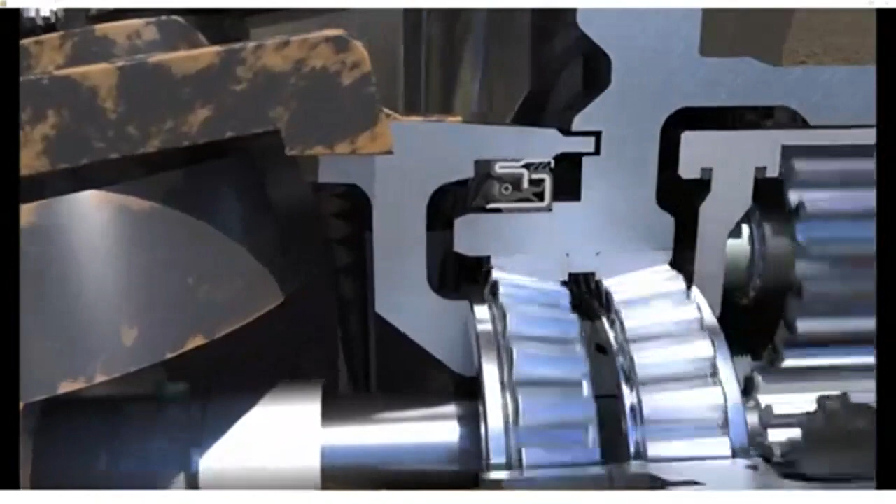long periods of time. SKF's Mud 11 multi-lip cassette seal keeps wheel end applications running smoothly and efficiently. It repels dust, dirt, and mud and stops lubricant leaking into the environment. The special design improves sealing performance and prevents downtime.

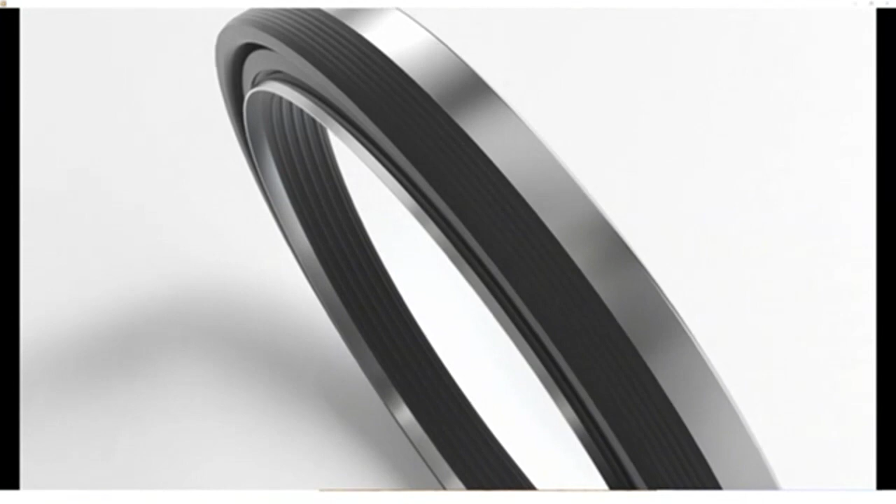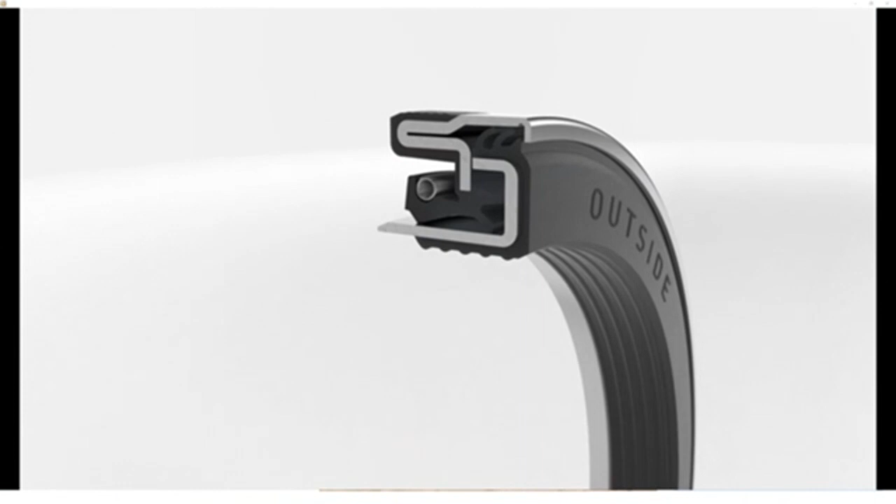Several innovative features help the Mud 11 to raise performance and reliability. Its outside diameter is half metal, half rubber. This improves static sealing, improves heat dissipation, and keeps lubricant within the housing. Because the seal has its own counterface, there is no need for shaft machining.

A rubber bonded sleeve makes installation easier and protects the sealing lips from damage during transportation, handling, and installation. All SKF Mud block cassette seals are designed with an integrated wear sleeve and a rubber inside diameter. A spring-loaded main sealing lip maintains lubrication and a strong seal, regardless of rotation direction. To avoid dry running, all sealing lips are pre-greased.

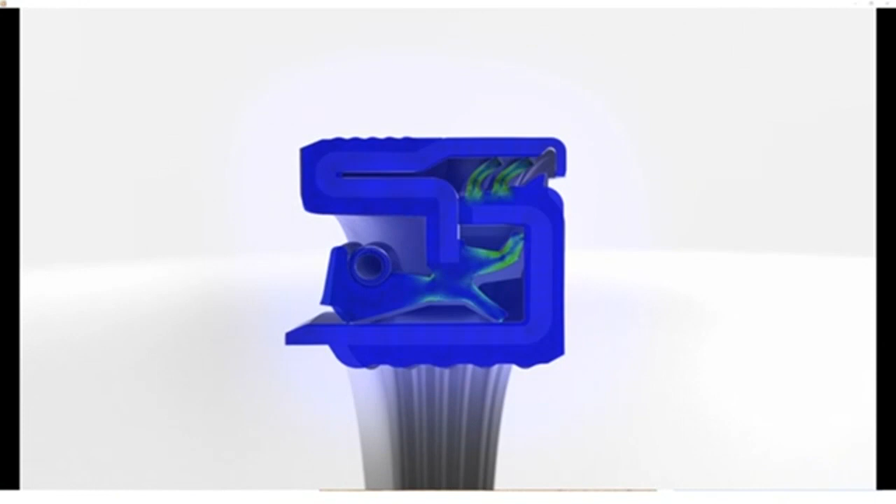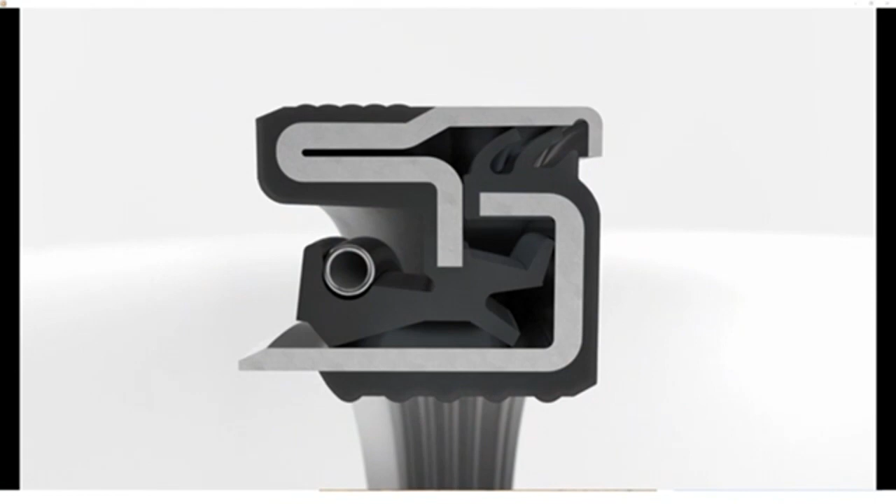Using finite element analysis, SKF's engineers can design an optimal seal. Lip configuration can be modified, for instance. Sealing lips can also be made from a variety of materials to suit specific applications. The Mud 11 cassette seal is easily mounted into position. This makes it simple to retrofit or to replace an existing seal.

Standard sealing lips are made of a special grade of nitrile rubber that reduces wear and aging and extends service life. Alternative materials such as FKM and HNBR can be used for more demanding applications. Here, we see that the Mud 11 in blue has 30% less friction than competitive seals. It also has a lower starting torque.

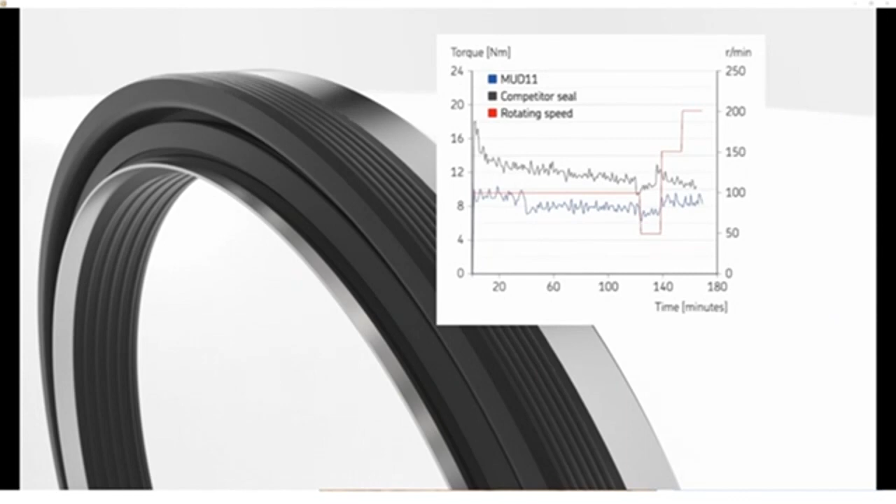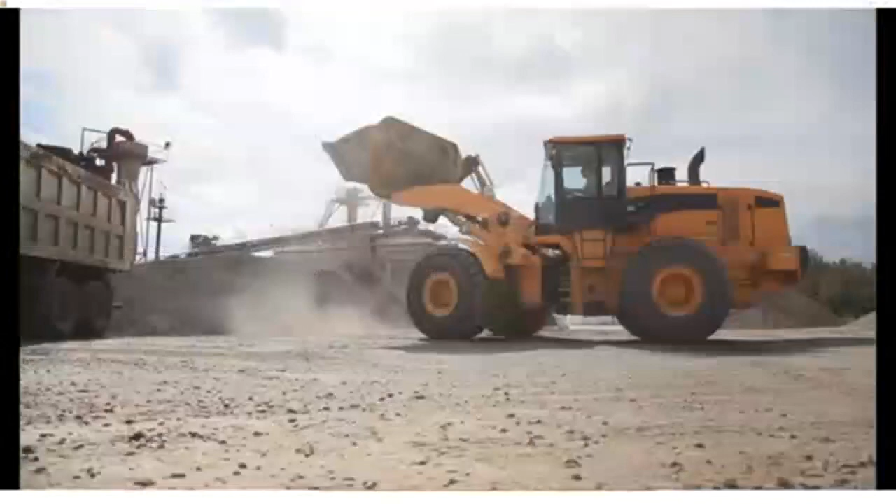In tests, Mud 11 resisted contamination ingress for more than 4,000 hours. That's around 50% longer than competitor products. Innovative design and advanced materials have given the Mud 11 an extended service life and superior performance. It reduces unplanned downtime and the need for maintenance in many types of heavy-duty applications. Mud 11 makes machinery more productive and operations more profitable.

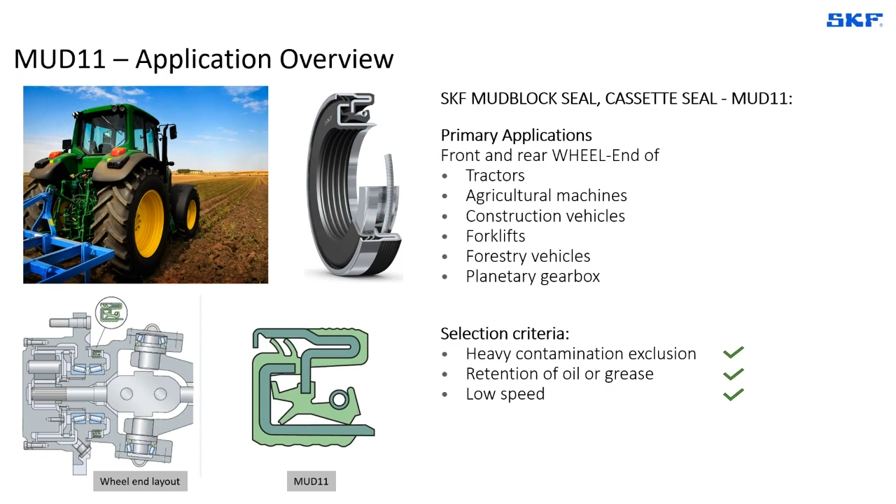Primarily what we're talking about, though, again, is going back into those application conditions being low speed. And a good thing about the Mud 11 is that it seals effectively both forward and reverse. It is also proven in rotating and oscillating positions. We will review one of the oscillating positions here on the next slide. Obviously, high contamination, and as already stated, can be used with grease or oil.

And one of the other unique things about it is the assembly ability, because it is a cassette seal. It is relatively easy to assemble, and the performance thereof is not specific to some high tolerance or high precision componentry.

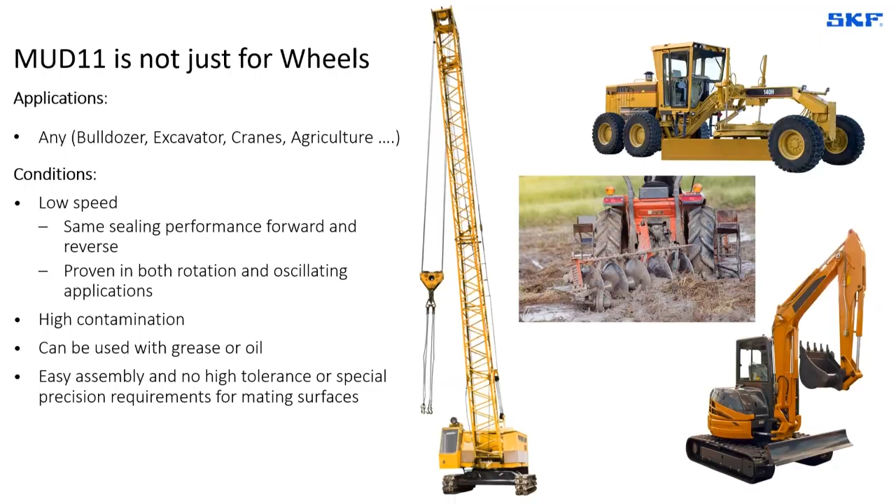Application one that I'm going to review with you that's a non-wheel application is in a suspension link for a piece of tracked equipment. When you think about a track for any type of vehicle, you're talking about something that's going to be near the ground, probably encased in mud, dirt, dust, gravel, and even submersion at times. That's the critical design criteria around the Mud 11: contaminant exclusion.

In this case here, it's unique because the seal is actually not rotating. It is oscillating back and forth as the suspension travels up over obstacles or whatever it might be. The seal actually is going back and forth. And in this case, it is actually a greased condition, but validated and in production today in this sort of arrangement. It's a nice little application.

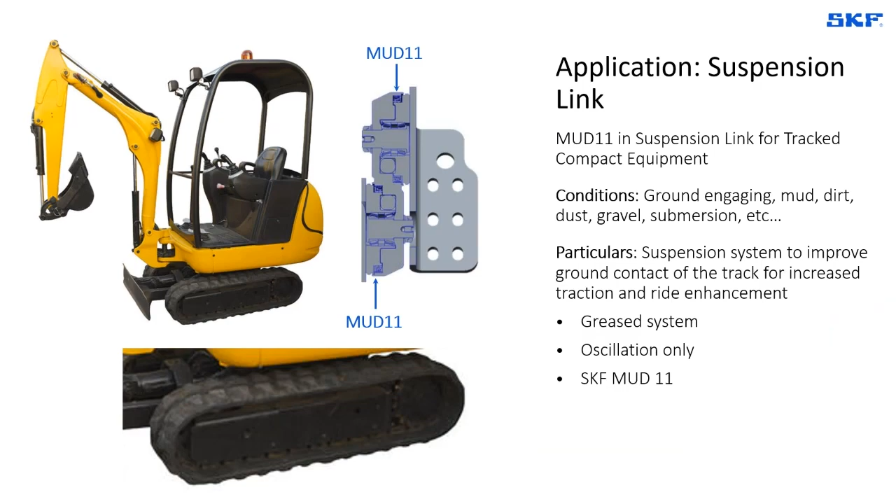The next application we'll review is what is called a power harrow. Again, this is not on a tractor wheel. This is in an attachment, obviously powered and pulled by a tractor. But in this case here, there are a couple of unique features. Number one is the orientation. It is in a vertical shaft as opposed to most wheels, which run on a horizontal shaft.

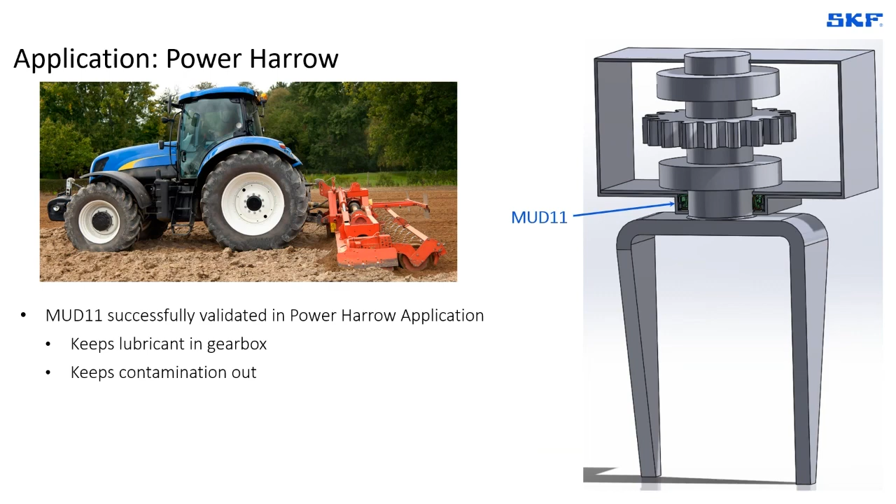It is heavy contamination. If you look at the application, you can see it is down near the ground. It is actually kicking the ground up, tilling the ground, so to speak. And it is the primary seal between the contaminant and what is generally an oiled gearbox, but it could also be grease, up above where the gears and bearings are. It obviously has the two main functions of keeping the lubricant in the gearbox and the contamination out.

And with that, that concludes the presentation with regards to our application references. I'll now pass over to Vinny, who will go into product details. So anyway, we have, I think, heard a lot about it in the video. I think that completely explains the offer application-wise. Bob has given a good overview of where all it can be used other than the main application it is intended for. And now we go a little bit into detail on the product as such, the application, and the tests that we have conducted internally, etc.

So why we call it the next generation of SKF mud block, the Mud 11. SKF has a series of cassette seals starting from Mud 1 up to Mud 10. And they are used in a variety of applications, customized for some customers, some are standard range. And I think most of you are aware that one of the mud blocks is also used in the SKF Agri Hub, which is sold as a hub unit out in the market, mainly for tillage applications.

So why this offer? I think this particular slide speaks more than 1,000 words. This is very apt for this presentation of why we have put this. Maximum efficiency under extreme operating conditions is crucial for any agriculture machinery. The equipment has to function reliably in a very harsh environment because any downtime or breakdown, especially during the sowing or harvesting, will lead to the wheel and bearing failure and thus reduces the productivity for the farmers.

Some product information. The offer that we have launched is a standard range from a 25 millimeter shaft up to a 250 millimeter shaft. And the application is mainly the tractor wheel end. This seal is designed keeping in mind the wheel end of a tractor. And yes, as Bob said, we can use it in other applications like a construction vehicle, maybe a small skid steer or a small wheel loader having similar parameters in terms of application, or a forklift, or even a forestry vehicle, and even planetary gearboxes or drives that we have.

The selection criteria is always whenever there is a heavy contamination, when you need to seal oil as well as grease. I mean, this design, what you see here is mainly intended for oil, but it can also seal grease in the same way. And of course, very low speed, not high speeds, and we'll touch upon that fact later on in the presentation. What you see on the left-hand side here is a section of the wheel end, and in the green color, you see a seal here, which is actually protecting the taper roller wheel bearing.

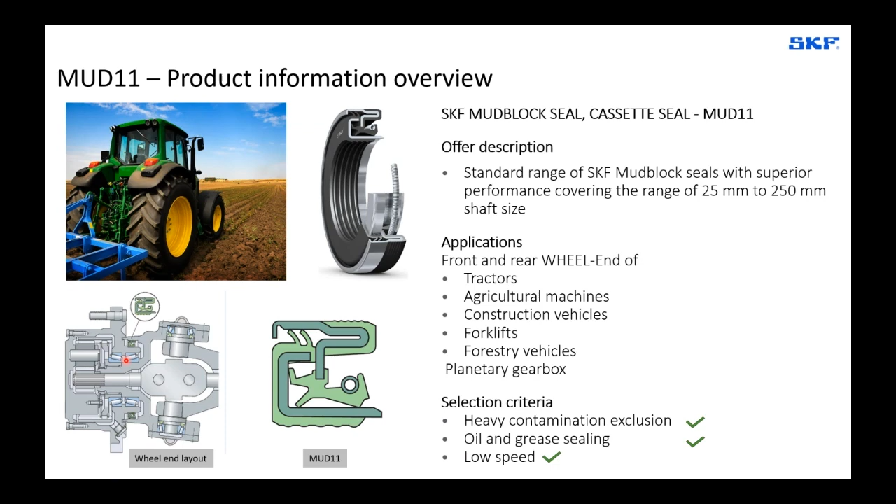The application conditions: long and intensive work periods. You can imagine that during harvesting or sowing season, the tractor is working more than 12 to 14 hours a day continuously. It is non-stop because most of these equipments are rented. And I think you pay around 200 euros per hour on renting. So you do not want to waste even a few minutes of your time and lose productivity. That's why it is working continuously for 12 to 14 hours during season.

And you can imagine the environment in which it works, as you see in the picture here. And it's exposed to very harsh contamination. So any failed seal will allow the contamination ingress into the bearing and destroy the bearing. That means the wheel and bearing failures will finally reduce your productivity, will increase your maintenance costs, etc. And when it comes to the original equipment manufacturers, it means warranty claims or even damaged reputation.

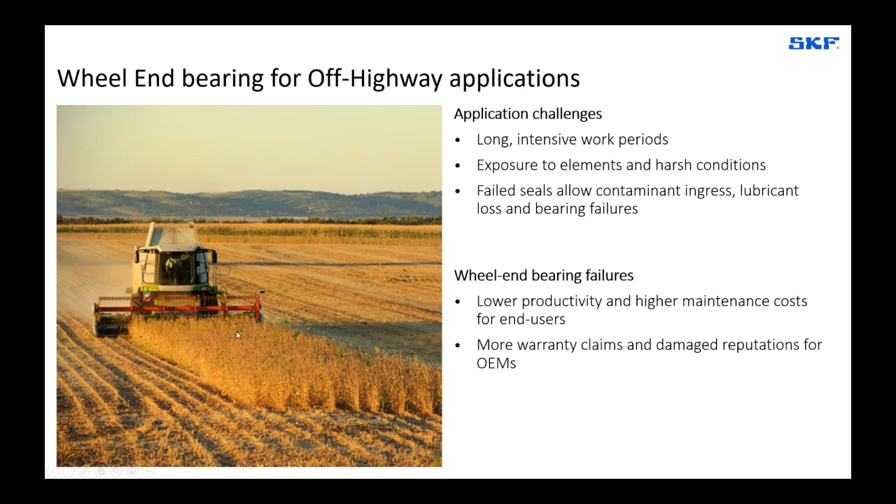We speak a little bit here on the Mud 11 design as such, and what features are there in this particular design. We see a half metal, half rubber on the outer diameter here. The intention of this is that the metal will do the retention and the rubber will do the sealing. That means it has got a good press fit as well as good sealing.

When we come to the inner diameter, we have a full rubber on the inner diameter. That is because we want to keep the press fit force a little lesser so that once it is assembled in the housing, when we push the shaft inside, the seal doesn't move. As well as it provides a good sealing because of the full rubber.

The main lip, that is a spring-loaded garter lip, is specially designed, let's say SKF design, for optimized sealing. It basically protects against the oil flowing out, so it's mainly an oil seal, and it is a spring-loaded seal. Sorry.

Then we have the multiple lips here that you see, four multiple lips. That is basically to keep the contamination outside as a barrier against the contamination to protect not just the oil inside, but also from the main lip being damaged and the oil finally leaking.

We see here a lump of rubber. We call it the bumper. That is actually a very important feature here because that keeps the relative distance between the seal and the sleeve.

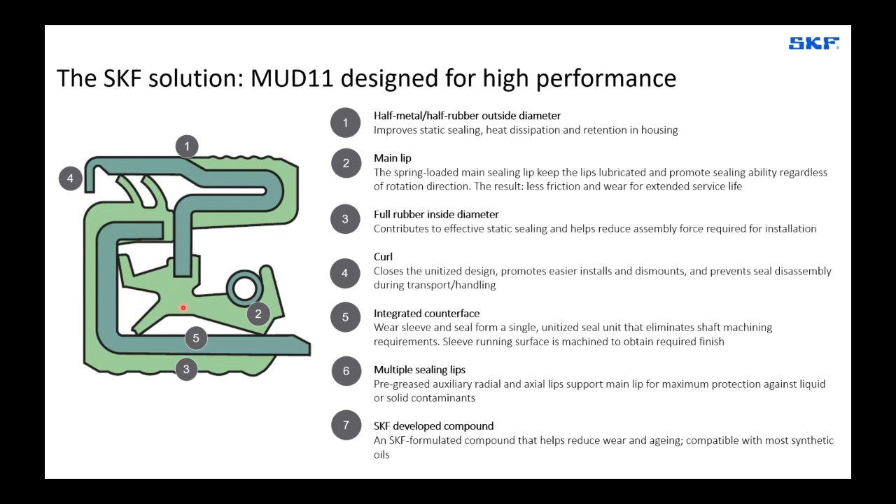So the benefits of this to the end user: increased productivity because you have a reliable seal that gives you less maintenance and reduces your operating costs. So, highly reliable performance, and retrofit to existing envelopes.

This means that if you're already using a cassette seal, or even a shaft seal which is not a cassette, you can replace it with the SKF cassette seal into the same envelope without any modification.

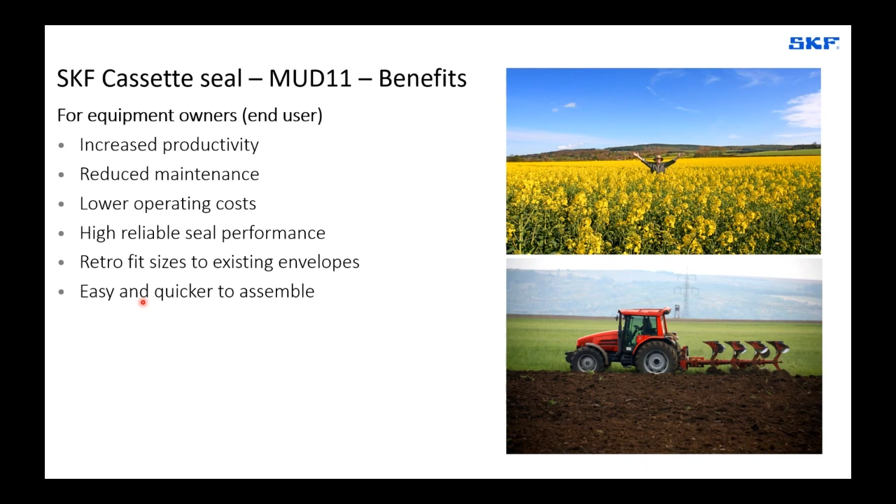Of course, it is easier and quicker to assemble because it's a cassette unit and you just have to plug it in, in two steps. And you can also do a blind assembly, because most of the time when you're assembling the seal into the wheel, you really don't see the seal as the shaft is pushed inside, or even in some cases when you push the seal into the housing. Under these circumstances, a cassette seal is very safe and easy to assemble.

Benefits for the original equipment manufacturers: increased service life means reduced warranty costs, and a reliable seal partner.

I mean, we are not having just one seal. We are having a range of seals that fit in most of your applications.

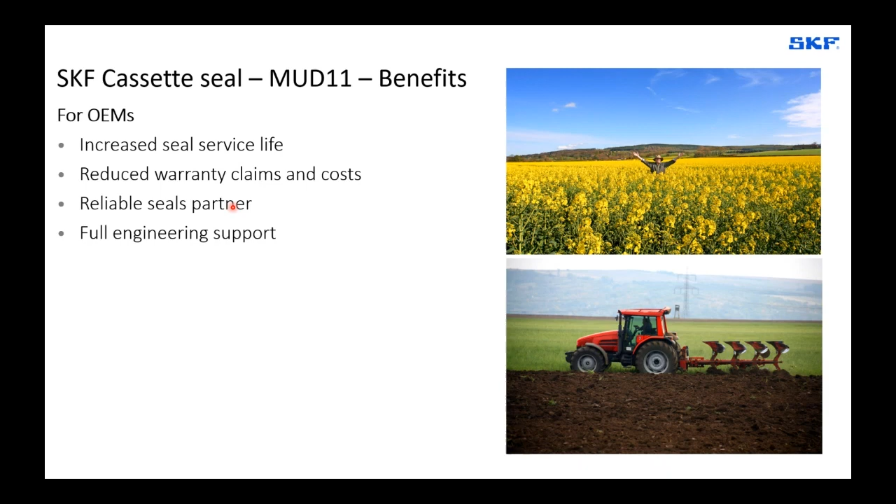And we will provide full engineering support. That means, right from the selection of the seal for a particular application, to validation, analysis, or tooling, assembly tooling, we give you complete engineering support, and we have local representatives in most countries who will support you on this.

The benefits for our distributors: we have a cross-reference to competitor seals, and we also have an OEM reference that we can provide you.

The items are in stock. We have regional stocks in three regions. Right now we have it in Europe, but we will also have it in the US and Asia.

We have a gross price list, and this is mainly for our European customers. Information package for your web shop, so we have a complete product package information.

If at all you would like to put an SKF Mud Block offer into your website for your customers, we can provide you all the information needed. As for packaging, we have double packaging, meaning the seal is put in a blister pack and then in a collective box before being shipped to distributors. If you want to learn more, we have the SKF Distributor College where we offer trainings as you request, and can give more detailed information on specific applications.

Testing capabilities - yes, we have a lot of testing capabilities worldwide, but here we are talking about the mud block testing capabilities specifically, mainly located in the US and in Italy. We do the following tests.

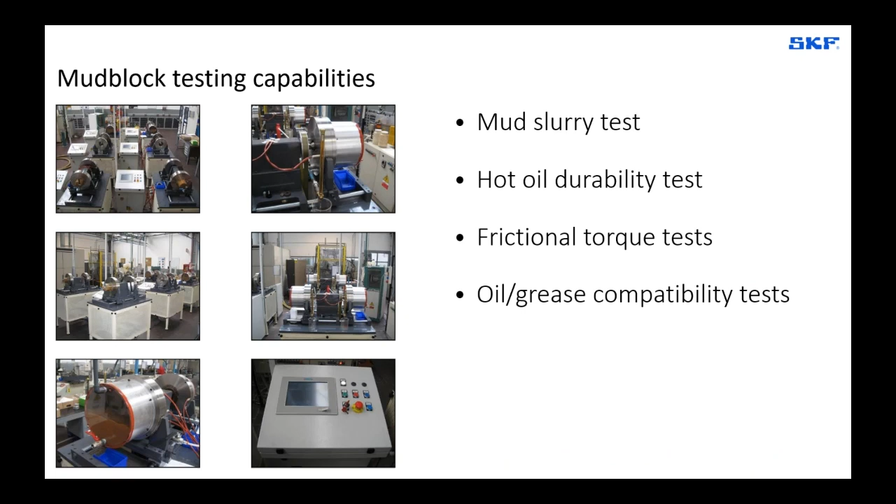Some details on how we run the mud and slurry test. Here is a rig with oil inside the drum, and on the external side a small container half filled with mud and slurry - a specification of mud mixed with water made into a slurry. Here is a schematic, and this is the test we run.

Different customers run tests at different speeds - some at 50 RPM, some at 75, some at 100. We have taken 100 as our standard because it also accelerates failure, putting the seal into severity. We run both clockwise and counterclockwise during the test, applying standard dynamic runout and STBM into this machine. Most of the oil used is a standard SAE 90, or sometimes if the customer gives us a specific oil, we use that.

The fluid is full, and for temperature, if it is an NBR seal we keep it at 70 degrees; if it is FKM, we keep it at more than 100 degrees. Test duration is testing until failure.

So how do we measure failure? In the laboratory we do an analysis, taking samples once every 2-3 days to check if, in the slurry sample container, we have oil present, or vice versa. The slurry is basically calcium chloride mixed with fertilizer and clay sand. We have a test cycle that is 9 times clockwise and 1 time counterclockwise. We selected all these test criteria keeping in mind the real application of the tractor, trying to be as realistic as possible.

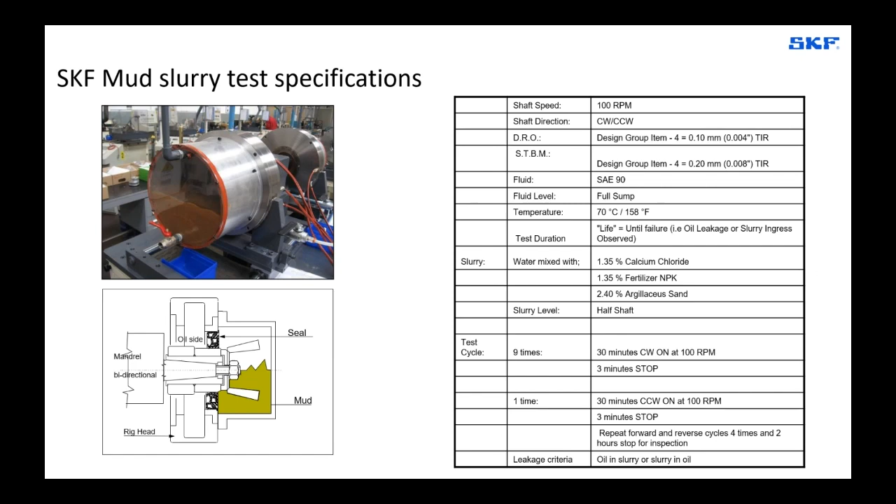The mud slurry test has been conducted as a series of tests for more than 5-6 years, across different sizes. We have seen that in each and every test, the SKF Mud Block seal has outperformed our competitor seals. Based on the test results we have plotted the data, showing up to 40 to 50% increased service life in our rig tests.

When it comes to the hot oil durability test, we run at a higher RPM, going up to 200, with no contamination or slurry in this kind of test. This validates the performance of the seal at slightly higher speeds, considering the tractor will also move on the road at higher speeds, up to 50-60 kilometers per hour. Here too we have seen our seals cross more than 5,000 hours running without any contamination, an increase of 40 to 50% compared to competitor seals.

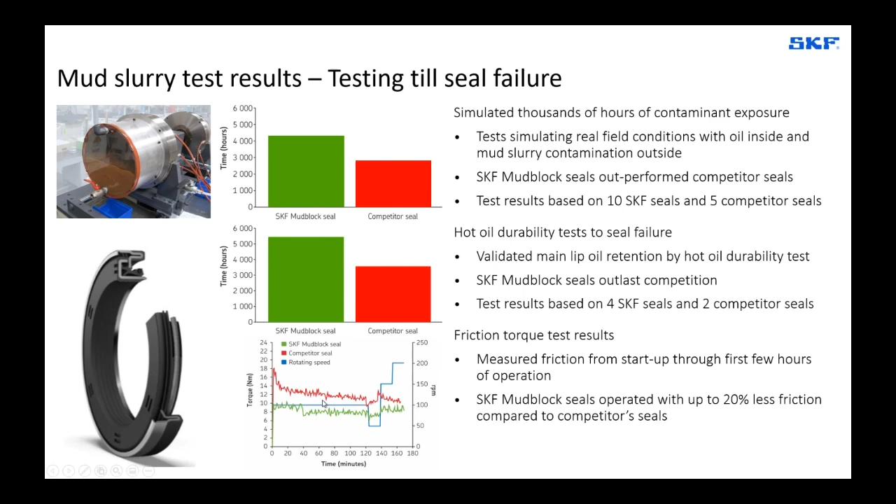We also did a friction test - this is the initial torque test as soon as the seal is new. When there is an assembly criteria with certain friction requirements, that's what we tested here. In the initial torque, we achieved a 20% reduction in the starting friction of the mud block seal.

The assembly procedure is a two-step assembly. The first step is to assemble the seal into the housing, and we use a tool here. You can see the design of the tool just covers the sleeve part; it does not go up to the full seal.

Then you push the seal in, and the second step is pushing the shaft inside. Usually, if there is space in your application or housing, we leave a clearance of 1 millimeter, but it's not mandatory. If you don't have that space, we can flush it to the bottom.

The surface roughness, both for the shaft and the housing, we have a surface roughness of 1.6 to 3.2 RA value, which is H8.

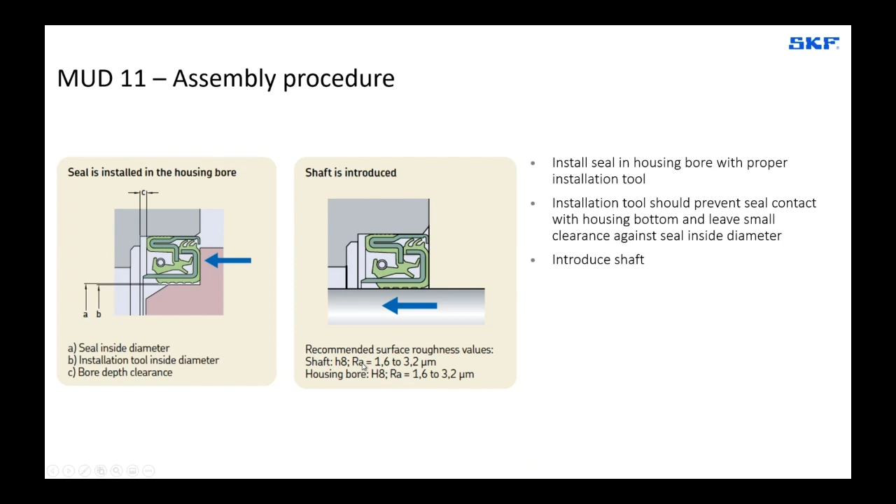Global support: as I said before, we have application engineers globally located in most countries who are knowledgeable with this kind of seal. They can help you from seal selection to seal assembly tool design, or if there is any testing to be done, they can coordinate with the testing center and plan for the tests. Or if you have conducted some tests, we can run a post-test analysis and submit the report to you. So it's a very strong team that can give you all the engineering support you need to assemble or use a cassette seal.

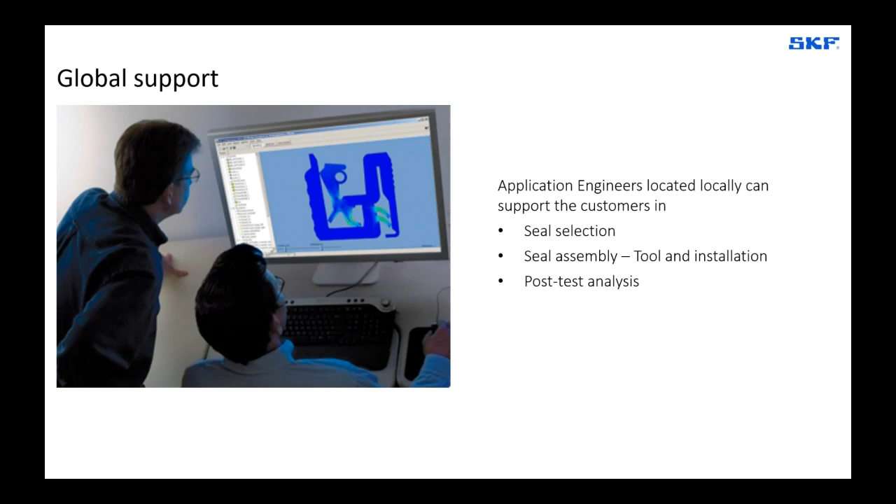The stock that we have today: we launched this during the first quarter of this year, and we have almost 20 sizes on stock. Most of them are in NBR, and we can also make FKM as the need arises. These come, as I said before, for the distributors.

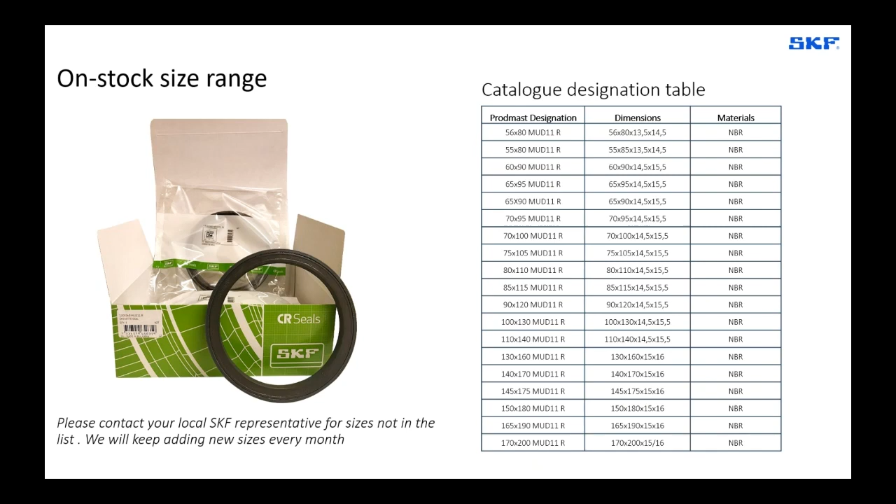It comes in a blister pack and a collective pack, which are then supplied to you. We keep adding more sizes every month, and this year we will add another 10 to 15 sizes to the range to cover the complete range. So basically, underlining the statement that we want to be a reliable partner for you, meaning we can cover the range of sizes that your application needs.

Marketing material: we have a lot of marketing material on this product line. We have a specific brochure that gives you the details. If you're dealing with agriculture applications, we have an agriculture catalog with all the offers for agriculture along with this seal.

We have a specific industrial seals catalog with information on this. As I said before, we have an interchange table that we can provide if you need to know the interchange for a competitor seal or an OEM part number. Of course, we also have some movies on YouTube, and some images, posters, and exhibits.

For presentations, we can make a customized presentation however you want, and we also have product presentations available. The product data package, as I said before, is basically for if you want to incorporate the mud block seal on your website. This is mainly for big distributors who want their own product page in the web shop, so we can give all these details.

Distributor college course, which is basically the training program we can offer through this. And then, webinars.

Product tables on skf.com: if you go to skf.com/mud11, you go directly to the Mud11 page where you find all the details, the application details, and the product tables. When you click on individual products, you find all the details, even specific tool sizes, since the assembly tool is different in size for each product. So we have all the details incorporated there to make it very useful for you and your end users or customers.